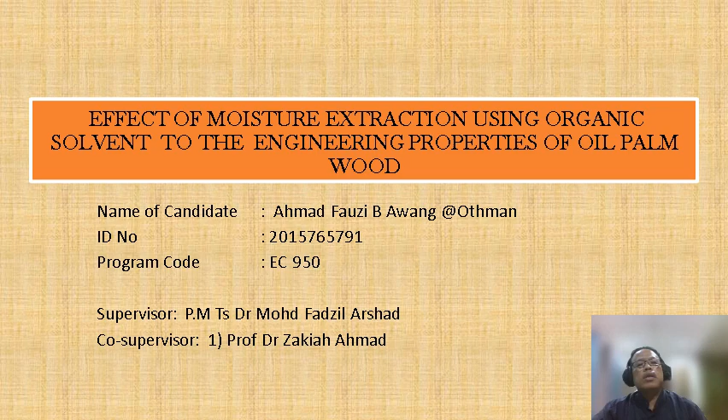My supervisor is PM Ts Dr. Mohd Fadzil Arshad and my co-supervisor is Prof. Dr. Zakiah Ahmad. My PhD title is Effect of Moisture Extraction using organic solvent to the engineering properties of oil palm wood.

For the introduction, oil palm wood is a residual material resource from the Malaysian oil palm plantation. It appears well suited as a raw material input for the solid wood industry because oil palm wood is a biomass resource in Malaysia. The replanting cycle of oil palm trees at 25 to 30 years makes palm wood an excellent sustainable timber resource for wooden products.

Plentiful but underused. Government policy encourages its utilization, as part of the national agenda on waste to wealth.

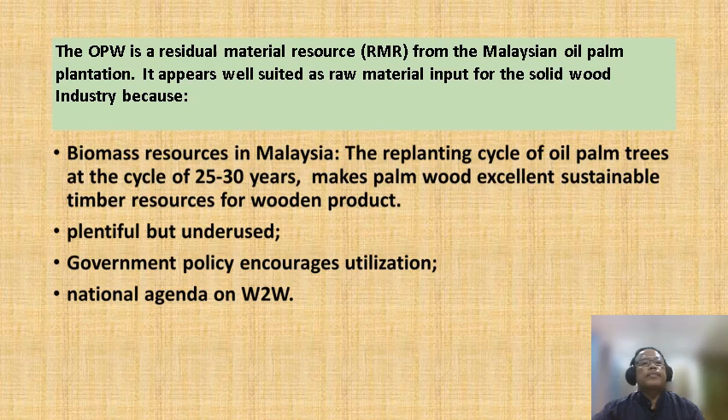Using palm wood also means using less forest log. The use of palm wood will prevent conventional wood obtained from forestry from being felled just for the purpose of providing timber. More forests can be kept intact as deforestation is avoided.

Renewable, sustainable and green.

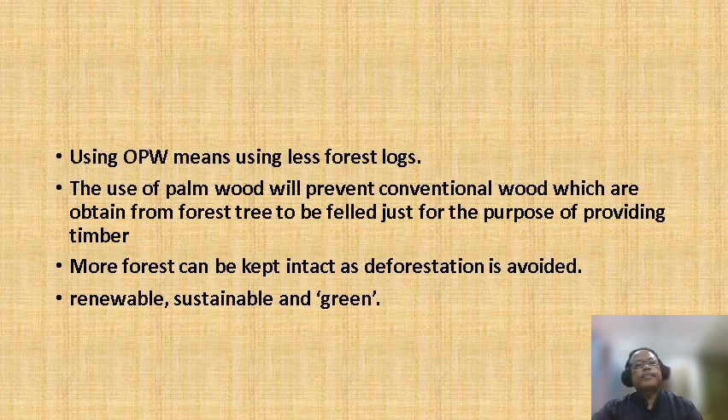Oil palm wood drying: to enhance product utilization of the oil palm biomass, the material must be dried first. However, variation of moisture content and density of the trunk limit its full utilization. This makes processing of this biomass resource a considerable challenge.

Mainly from the trunk, which can have a green moisture content of up to 150% to 600%, and density of 150 to 700 kg per m3.

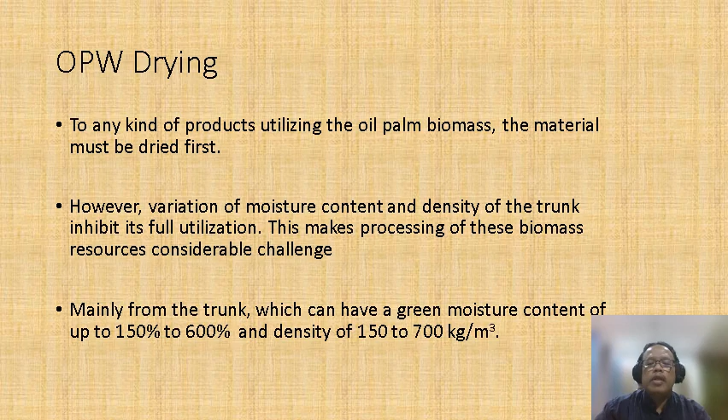Moisture extraction by organic solvent: in the 1970s, researchers realized that the ability to dehydrate wood at low temperature would be a flagship achievement, since many species were not resistant to critical temperatures. At this time, scientists embarked on the quest to establish the interconnection between the organic solvent exchange method's efficiency and the dimension of the log used.

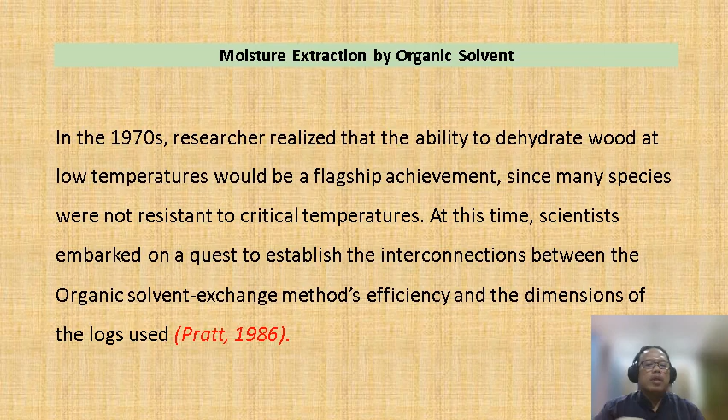The aim of this study is to discover a new drying method for palm wood which uses three types of organic solvent, followed by determining the optimum method to avoid drying defects. It will also determine the effect of drying parameters, such as type of organic solvent, on the physical and engineering properties of palm wood. The comparison of treated and non-treated palm wood dried by oven drying will be determined to confirm the establishment of the data.

This is undiscovered and not established by any researcher or industry yet.

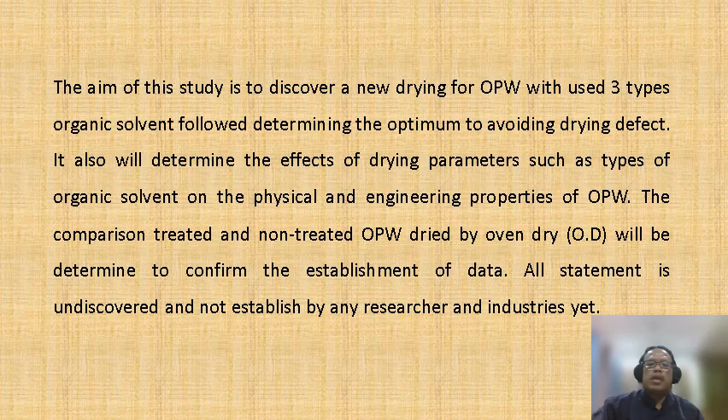The problem statement: first, supply of natural hardwood logs in Malaysia, especially West Malaysia, is depleting and prices are rising. The timber industry is a strategic industry that plays a key role in national development.

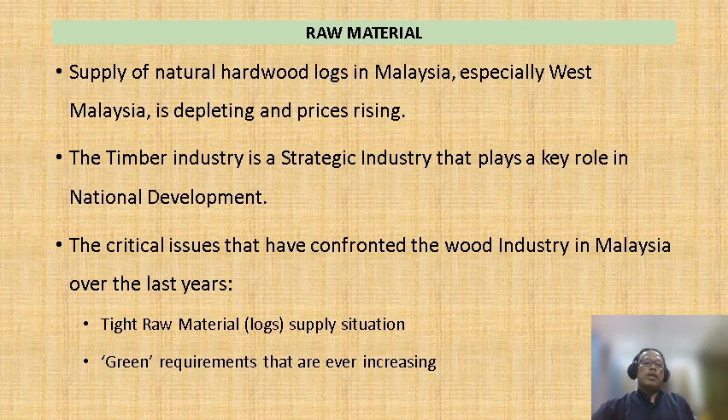The critical issues that have confronted the wood industry in Malaysia over the past years cover tight raw material log supply situations, and ever-increasing green requirements nowadays.

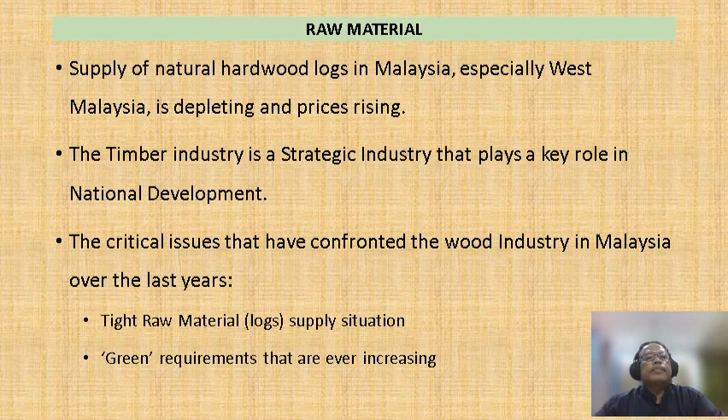Raw material logs obtained from the oil palm tree during clearing and replanting appear to be the way forward for the wood industry.

Green timber products face variation of moisture content and density of the trunk which limit its full utilization. This makes processing of these biomass resources a considerable challenge.

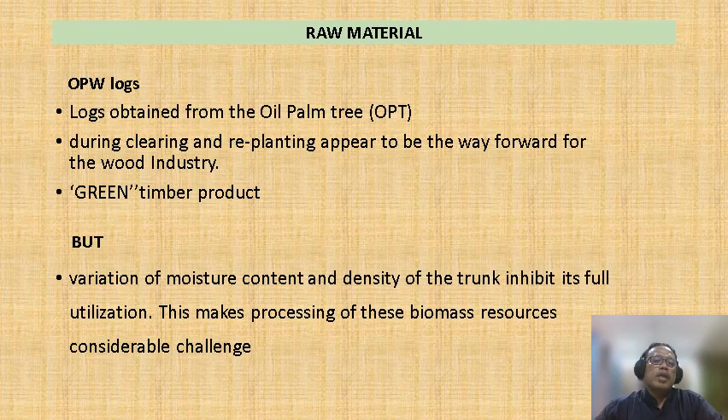A series experiment has been accomplished to observe the possibility of converting oil palm trunks into oil palm wood. However, the oil palm wood will not resist critical temperatures and will produce serious drying defect problems while using the normal kiln drying method used by the industry. This condition leads to inefficient drying processes in terms of time, energy, and material.

For example, one company dries it for a very long time, more than 5 weeks, while other companies dry it somewhat faster but with very excessive amounts and extent of defects.

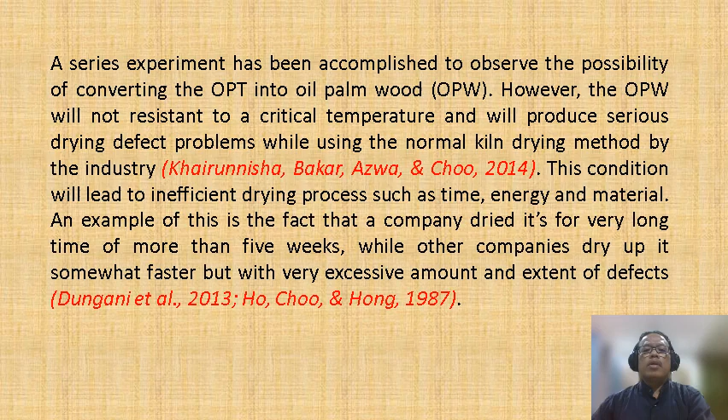The specific problem: there are no studies done before to identify this technique and its effect on the engineering properties of oil palm wood. Second, there are no studies to identify the optimal method to extract moisture from oil palm wood using organic solvent.

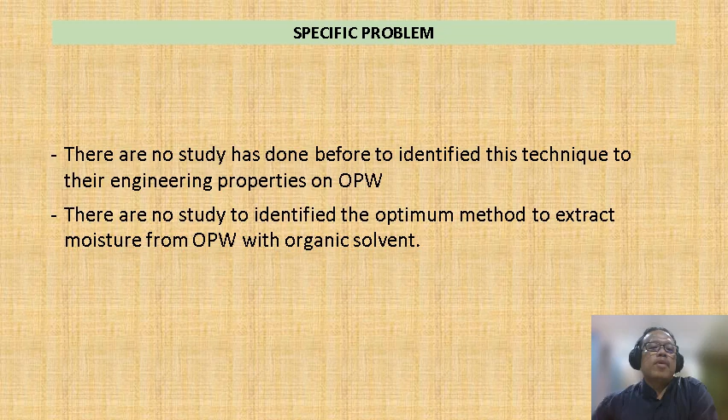The objectives of the study: first, to determine and produce the optimum organic solvent type to extract moisture from oil palm wood.

Second, to evaluate and identify the effect of using organic solvent as a drying agent on the drying characteristics of oil palm wood. Third, to analyze and develop a database of the effect of using organic solvent as a drying agent on the engineering properties of treated oil palm wood.

Fourth, to measure and establish the shrinkage level of oil palm wood due to drying using organic solvent.

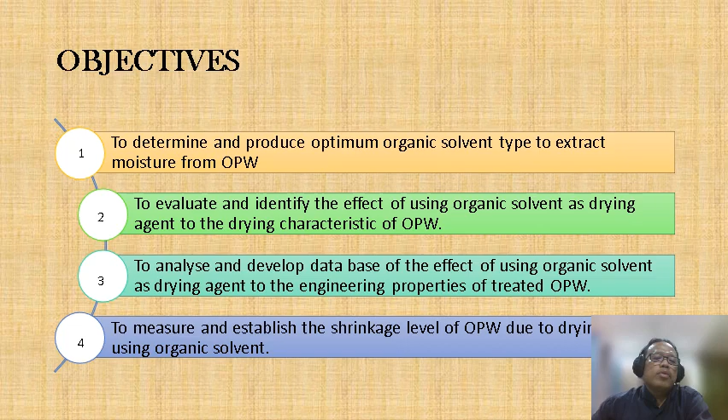The significance of the study: by knowing the engineering properties, treated oil palm wood can be classified to specific use, identify and measure drying characteristics, and find the best organic solvent to help in reducing drying defects and shortening drying time and costs. We will assess the optimal organic solvent that can extract the moisture content from oil palm wood.

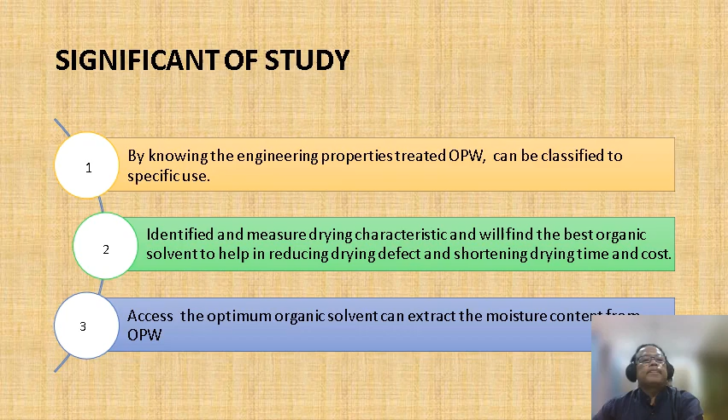Scope of the study: the material. A 24 year old palm trunk will be taken at the Agriculture Research Center of Tun Al Razak, Tekam, Jerantut, Pahang. Only the bottom portion, 4 meters from the breast height, will be used.

Organic solvent: the prepared palm wood samples will be immersed in 3 different organic solvents, which are ethanol, acetone, and toluene, for 24 hours.

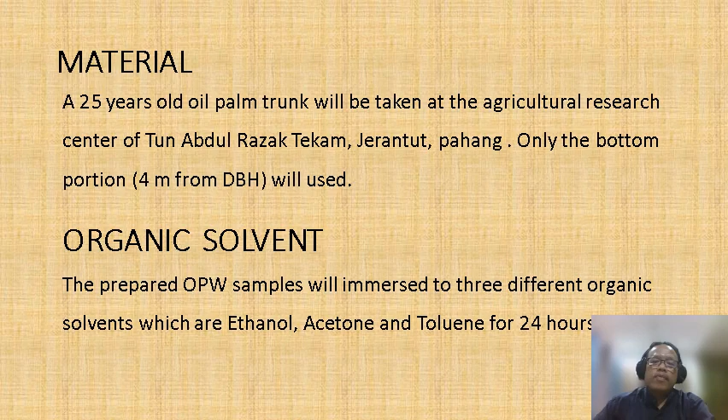Sample preparation: the trunk will be divided into 2 layers, the outer part being 1/3 from the peripheral region, and the core layer. Samples of 2 inch by 4 inch by 4 feet, about 30 samples, will be cut and stored in a freezer room at -10 degrees C to hinder attack by fungi and insects.

All samples will be placed in an oven for 5 days at 80 degrees C.

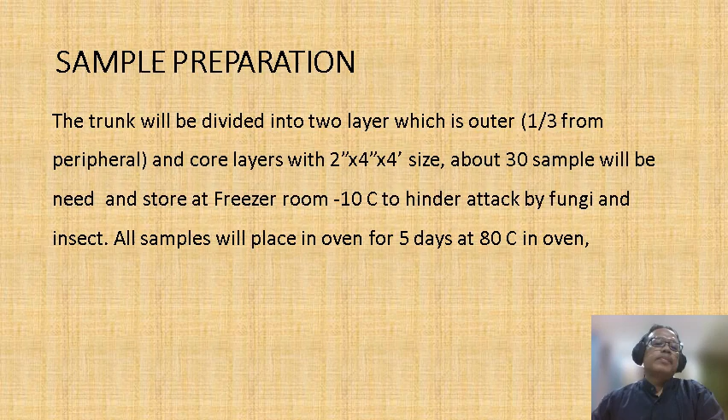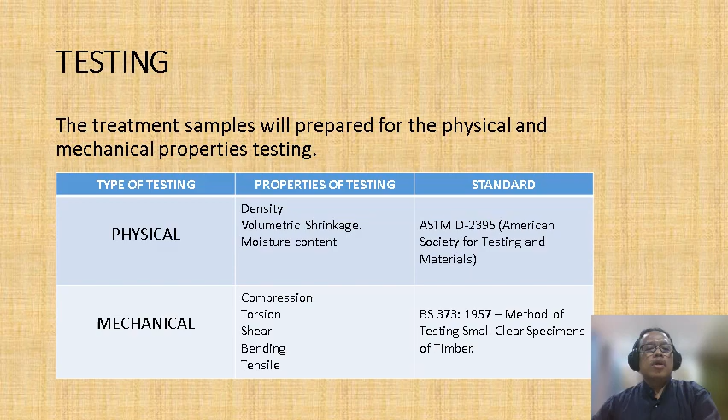Testing: the treated samples will be prepared for physical and mechanical testing. For physical testing, I follow standard ASTM D2395, American Society for Testing and Materials. For mechanical testing, BS 373 1957, method of testing small specimens of timber. Physical testing covers density, volumetric shrinkage, and moisture content. Mechanical testing covers compression, torsion, shear, bending, and tensile strength.

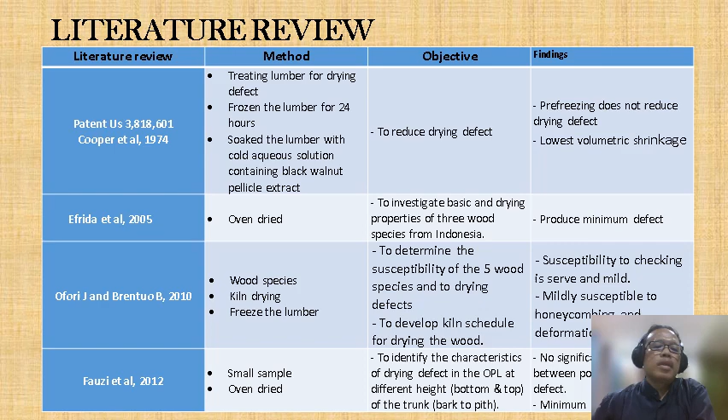Literature review: this table shows the literature review. I include patents from Efrida et al. 2005, Ofori and Brentuo B 2010, Fauzi et al. 2012, Fauzi 2013, Bernard Effah and Jonny Osei Kofi 2014, and lastly my own patent from 2021.

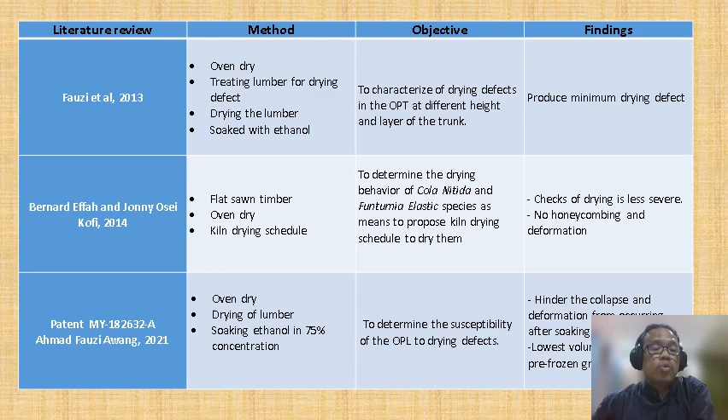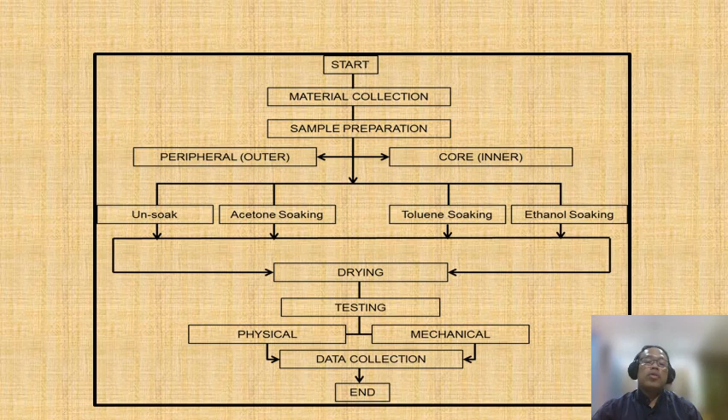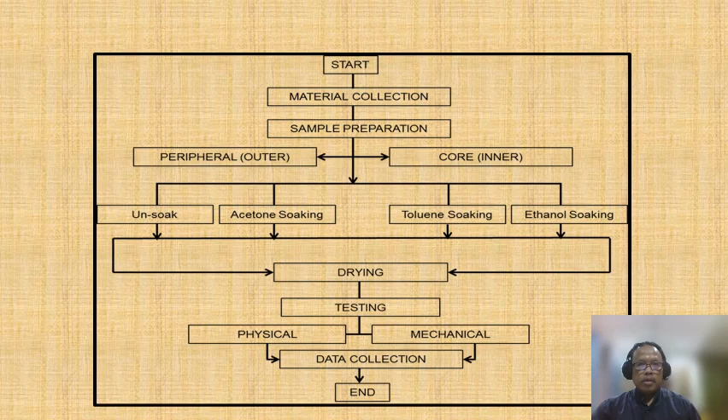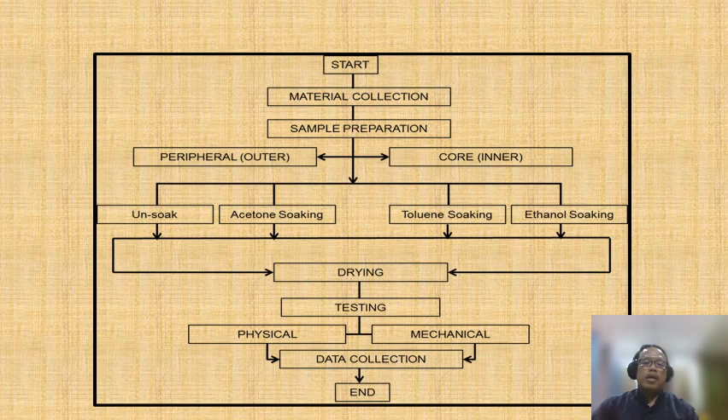This is my methodology flow chart, starting from material collection to data collection: material collection, sample preparation. We divide into two parts, the peripheral representing outer and the core representing inner. The untreated sample is the control, while acetone, toluene, and ethanol are the treatments. Treated and untreated samples go to drying at 80 degrees C in the oven. After drying, testing is divided into two parts, mechanical and physical testing, followed by data collection and analysis, which concludes this project research.

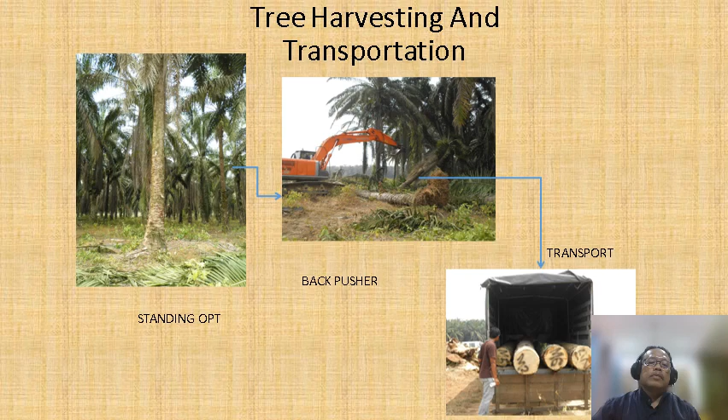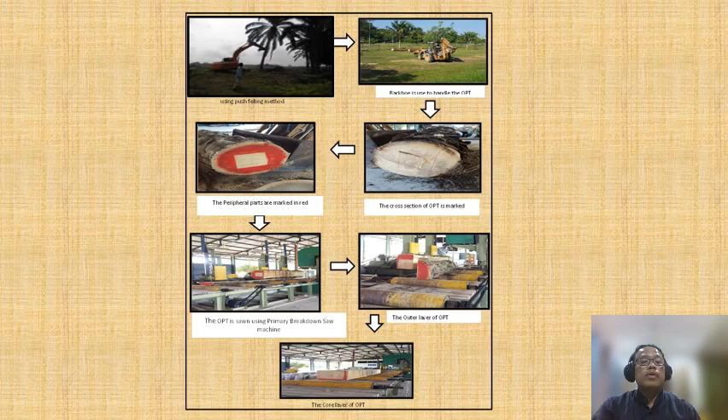This picture shows how I conducted my experiment, starting from the plantation. I use a back pusher to bulldoze the palm trunk, then transport it to the mill at Tun Pahang, where it goes to the bandsaw. It is divided by color: red color shows the peripheral part, no color means the core layer, the central part of the tree. It then goes to the bandsaw, soaking, and cutting to size.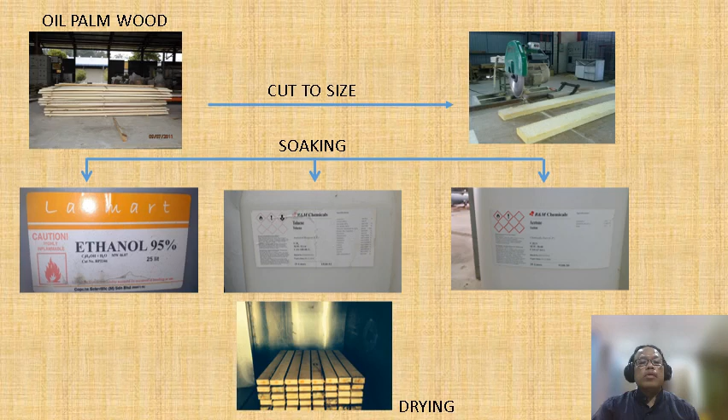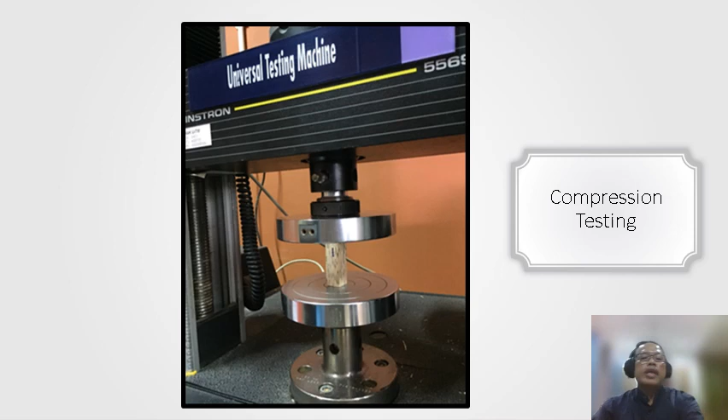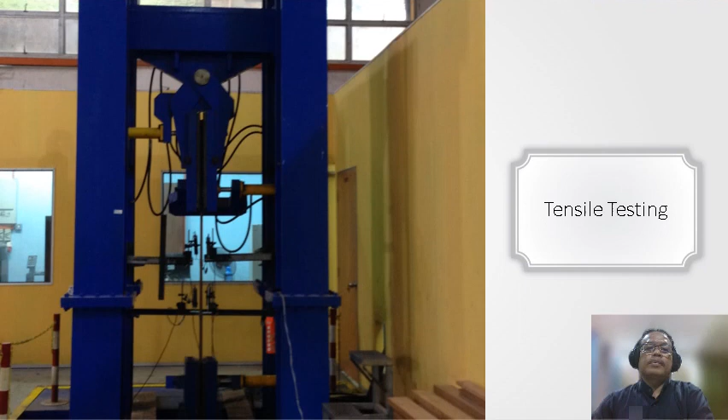Samples are soaked in ethanol, toluene, and acetone, then go to the oven for drying and testing. This picture shows the compression test, shear test, torsion test, and tensile test.

My current data results will be divided into two parts: mechanical and physical.

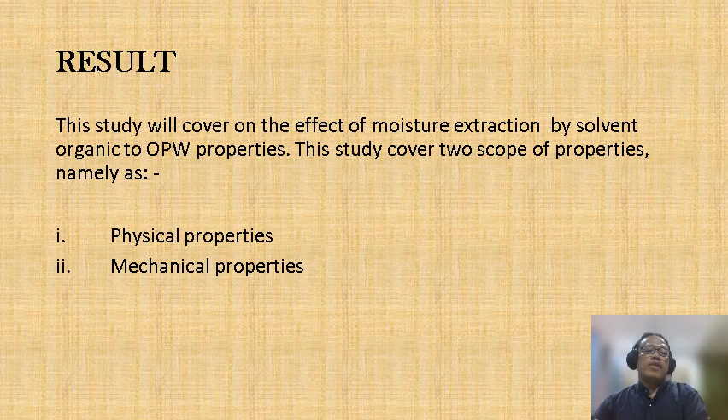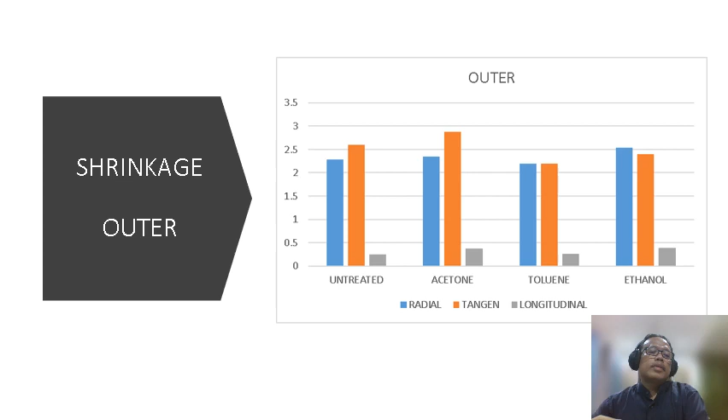This result shows the density for the outer part, density for the core or inner part, shrinkage for the outer part, shrinkage for the inner part, and moisture content for outer and inner parts.

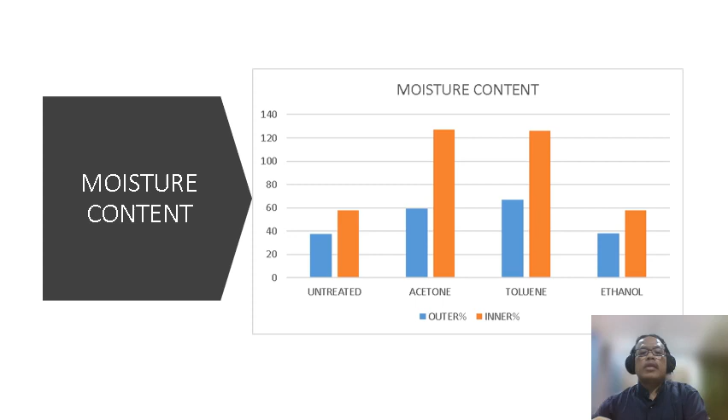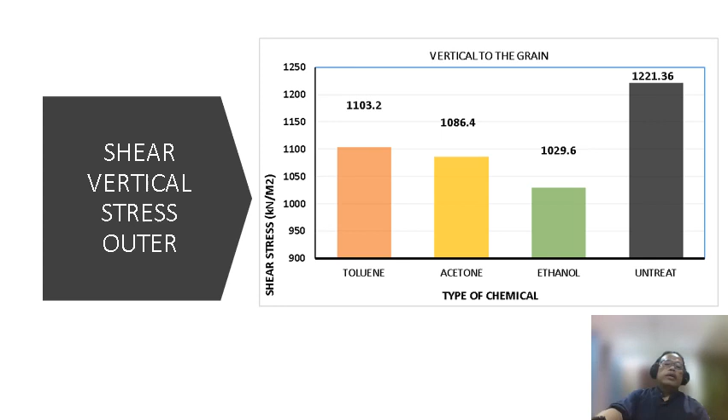Inshallah by the end of August the data will be analyzed, so we can know which part shows higher values after testing.

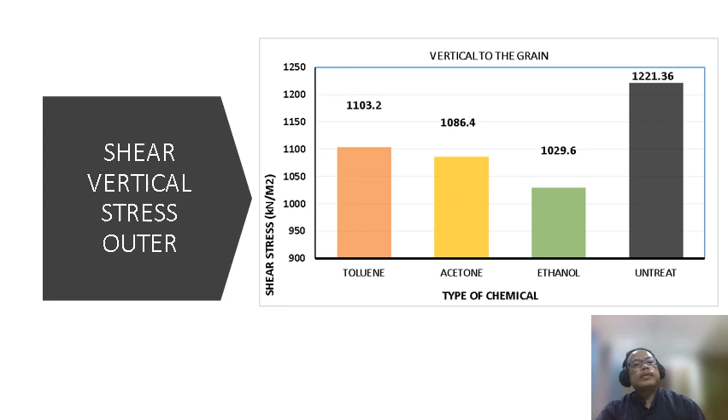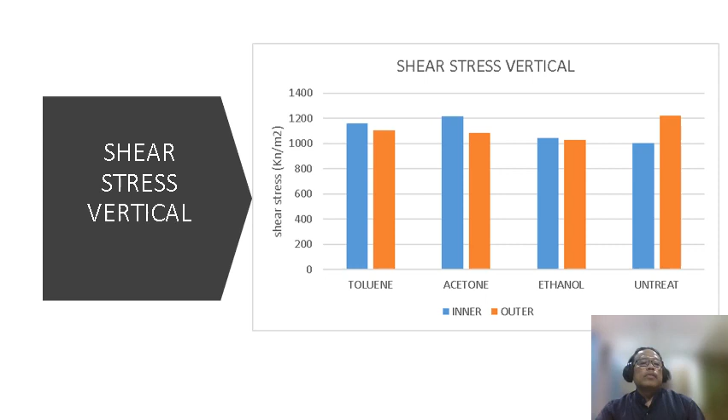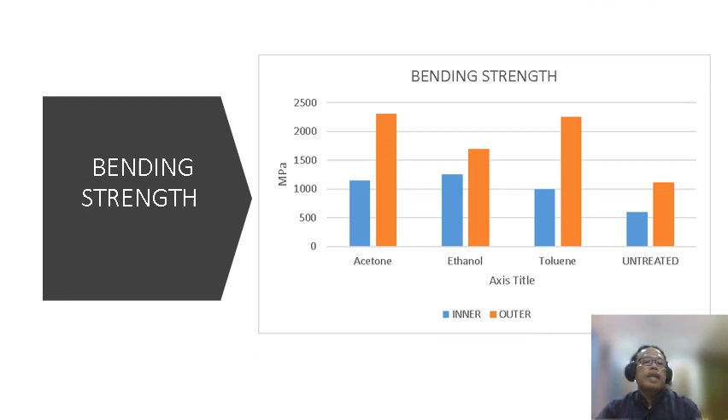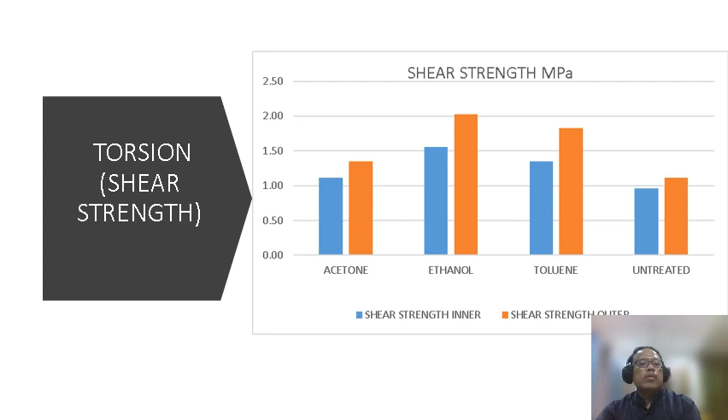This also covers vertical stress for the outer part, vertical stress for the inner part, shear stress vertical covering inner and outer, shear stress horizontal, compressive strength, bending strength, and torsion strength. Torsion will be divided into two: torsion for shear strength and torsion for shear modulus.

I also use scanning electron microscope and Design Expert for the optimization, to look more deeply at the oil palm wood structure.

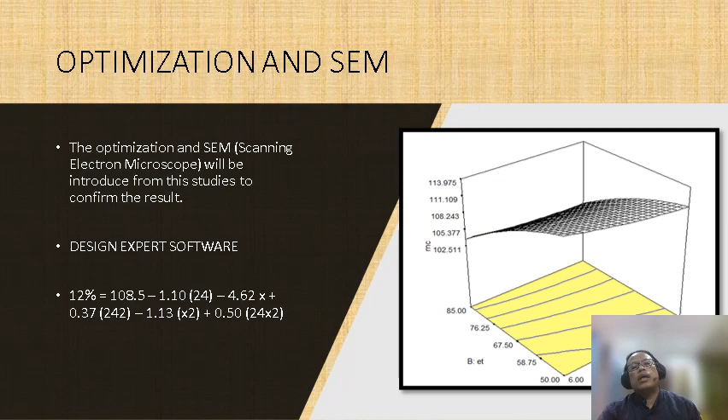This is my Gantt chart. I was supposed to finish my PhD in 2019.

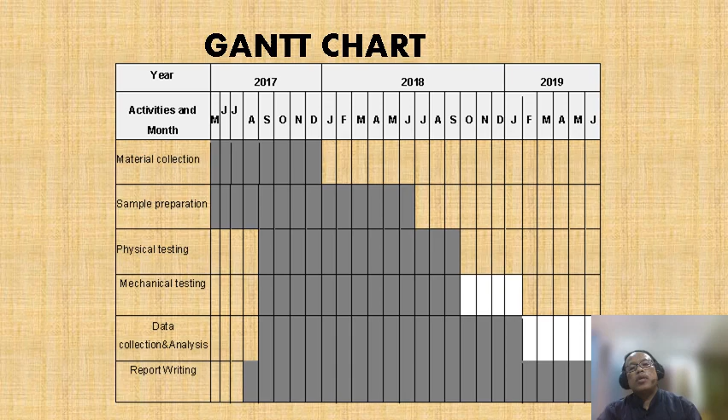For papers and presentations, the latest one is number 6. I submitted to the First International Academic Research Conference 2022, my paper titled 'Effect of Ethanol Treatment on Shrinkage of Oil Palm Trunk for the Drying Process.' This paper was accepted but needs revision.

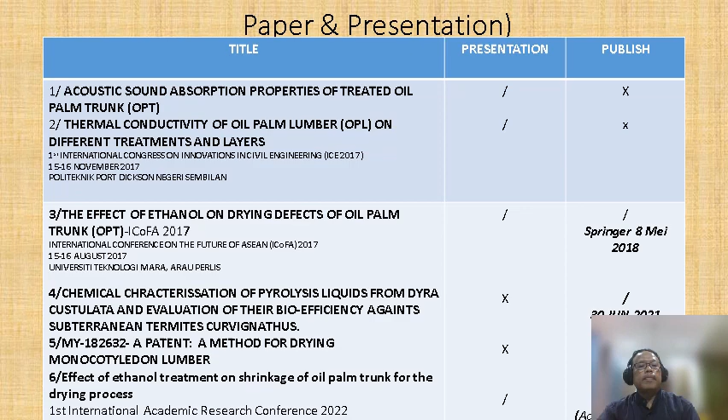My planning for next semester is to rearrange with the addition of new references, and add the missing chemical treatments of toluene and acetone.

My achievements and my patent.